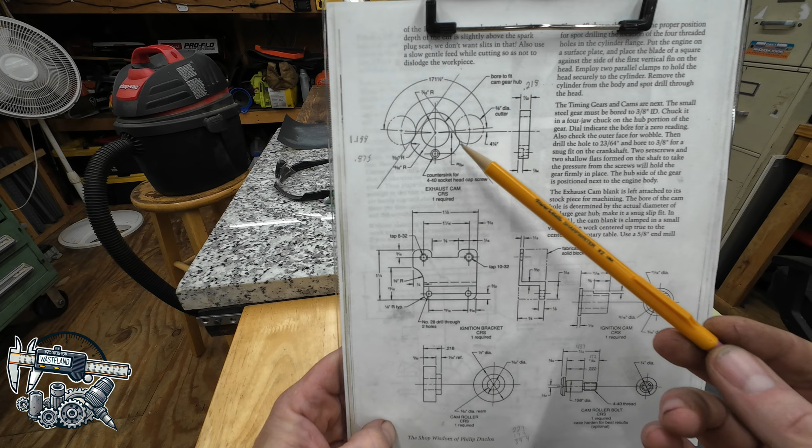Alright, so we have to make this camshaft right here, which is only used to open and close the exhaust valve. The intake valve works off of suction. I'll show you more how this all works when the engine is finally assembled. But as you can see, it's a kind of unconventional cam lobe shape. It's 218 thick.

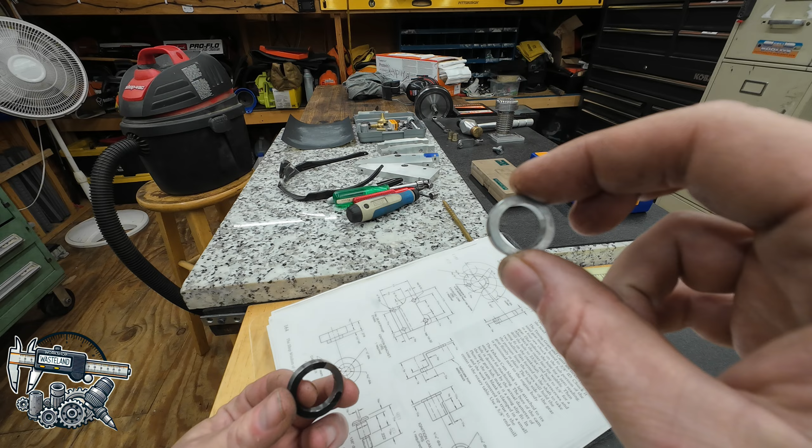Mr. Joe came up with a really clever idea to make this out of 2 separate pieces, which I'm going to try and do. I don't know if it's going to work or not, but it seemed to work in his video. Basically, this piece is the inner radius, and this piece is the outer radius.

I think you can see those 2 scribe lines on there. What I'm going to do is cut along these 2 scribe lines, clean it up really well, and then try to silver braze this together.

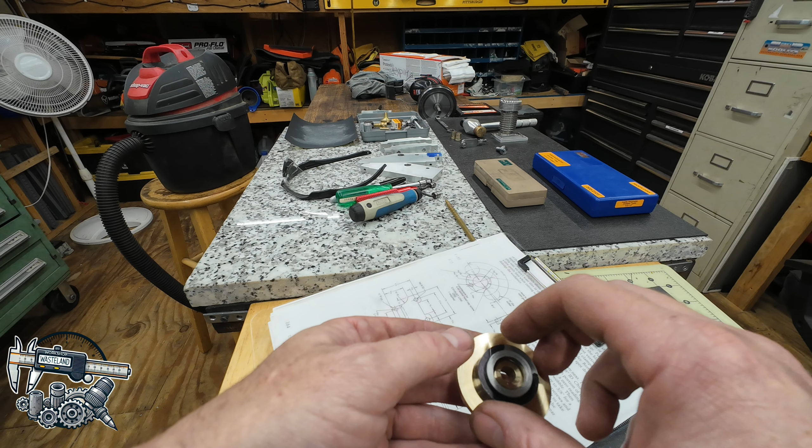Then, once assembled on our cam gear, it's going to look like this, and that's going to be the cam. This is of course going to be out here. I don't want to push it all the way on because it's a pretty tight fit, but that should create our cam lobe. So I'm going to get this sawn up and soldered, and then come back and show you whether it worked or didn't work at all. But in theory, it should work.

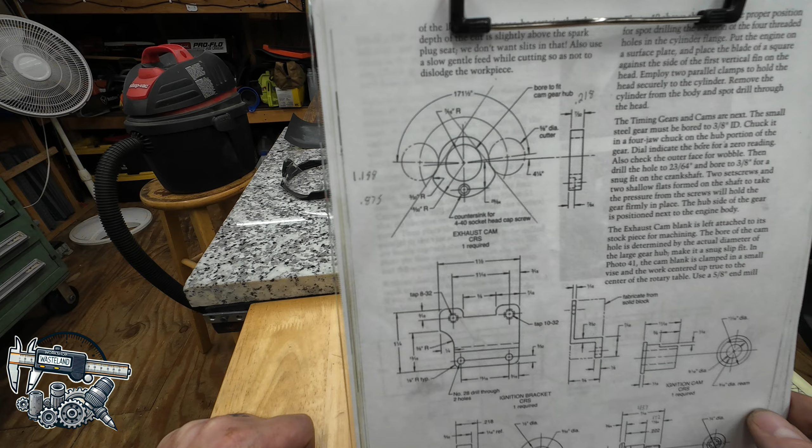I guess the ideal solution would be to cut this on a rotary table with a round end mill, doing a 171.5 degree sweep. But my only problem is my rotary table has a good bit of backlash in it, so I don't think I can do that super accurately. I've tried cuts like this in the past and it hasn't worked out well for me, so I'm going to give this a try first.

It was just a matter of turning these 2 rings up on the lathe, which was pretty easy—literally 2 metal rings, nothing to that. And I'm going to try this first. If it doesn't work, oh well, then we'll try the rotary table as the plans specify. But let's give this a try.

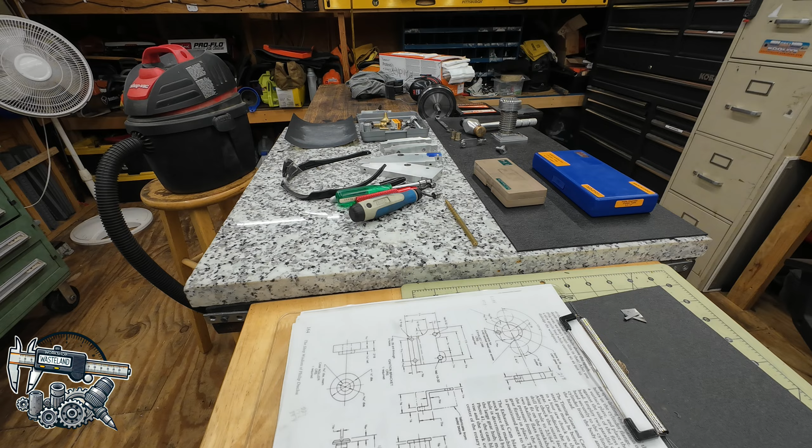So here's what you end up with for the cam lobe. And then this of course fits into our gear piece like so.

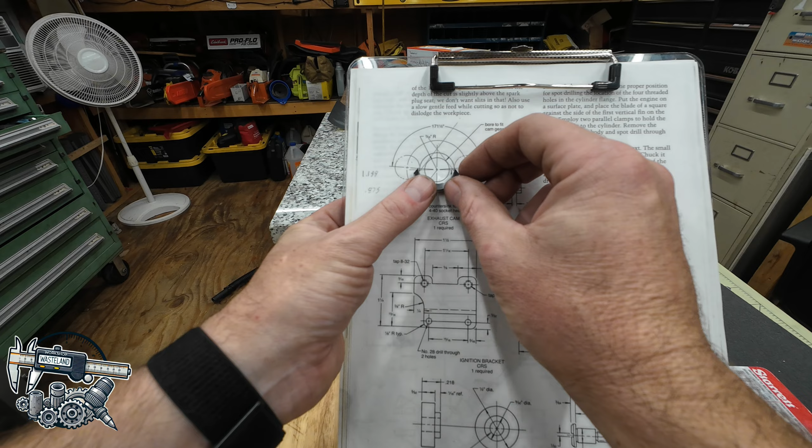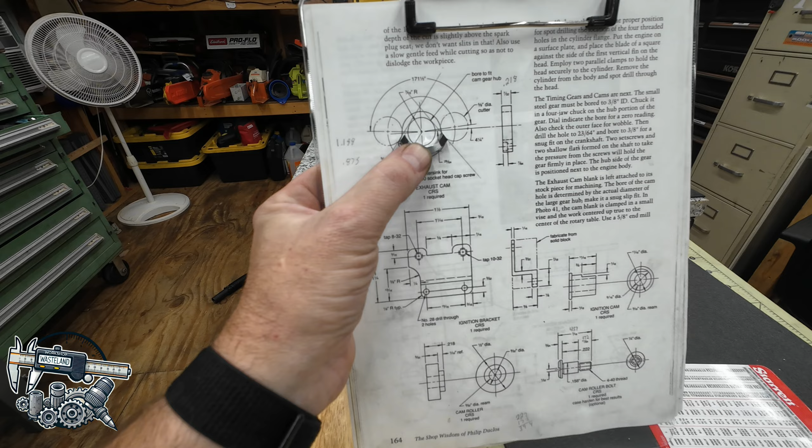However, whenever you lay it onto the print, it looks pretty darn good. Probably not 110% perfect, but I cut another one. This was the first one, and I cut it wrong, so it ended up not working, but we have what we need now. So I think we will be good to go when I lay this all together onto the print.

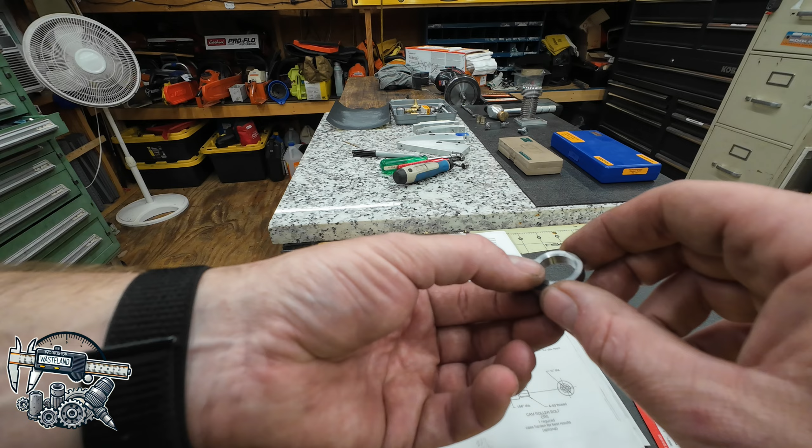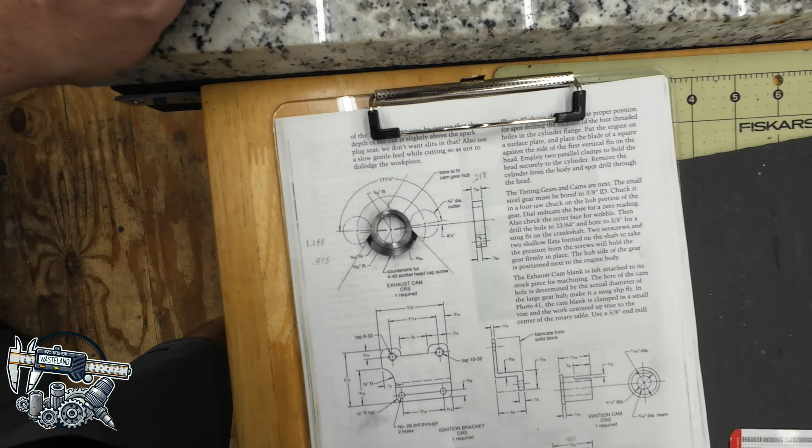Get it lined up with the hole here. That sure looks like it's going to be the cam lobe. I do believe that's going to work just fine, which is awesome. I'm going to silver solder this and we'll go from there. With any luck, that will be our cam.

Well, there it is. I used way too much silver solder, but I think we got a good strong joint on it. I am going to clean this up with some sandpaper and my belt grinder, and we'll see how it looks when it's all said and done. But I think that's a camshaft if I've ever seen one. Now we just got to see if it's going to work.

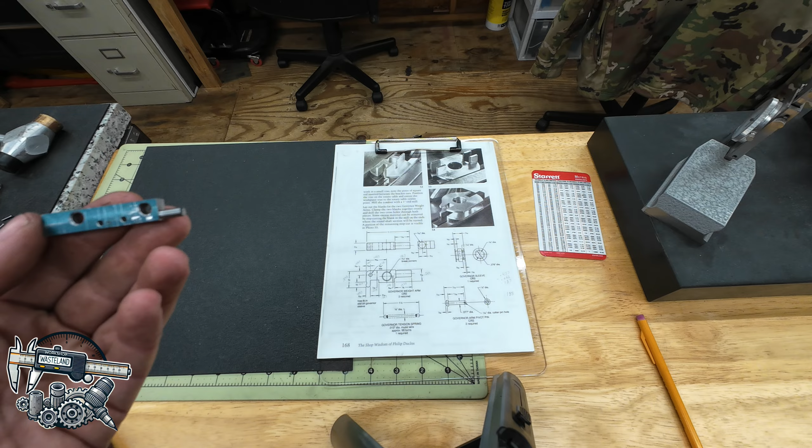So here at the end I'm going to make these, what are they called? Governor weight arms. I'm not going to video a whole lot of it. It's a really straightforward piece to make.

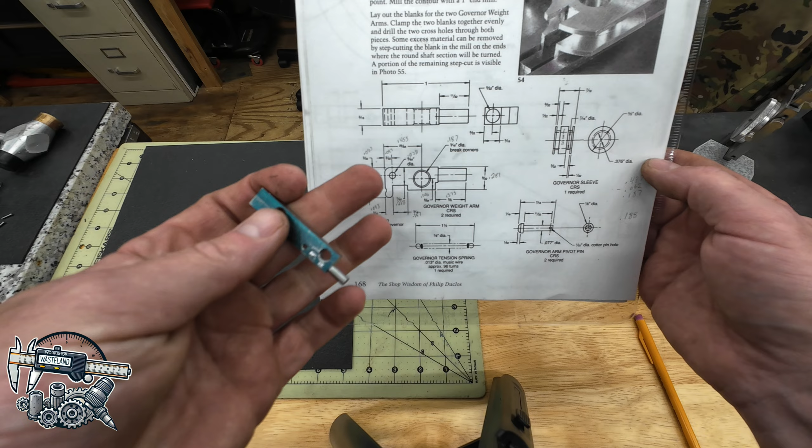This little dimple here at the end, I'm probably just going to barely hit that with a little tiny end mill and then use the belt sander and make that round. But that looks super complex, but it's literally 2 holes, turn the end of it round in the 4-jaw chuck, which you'll see me do, and then cut these 2 in half and kind of finish them up with a file and stuff. But like I said, it looks complex. It's a super easy part to make.

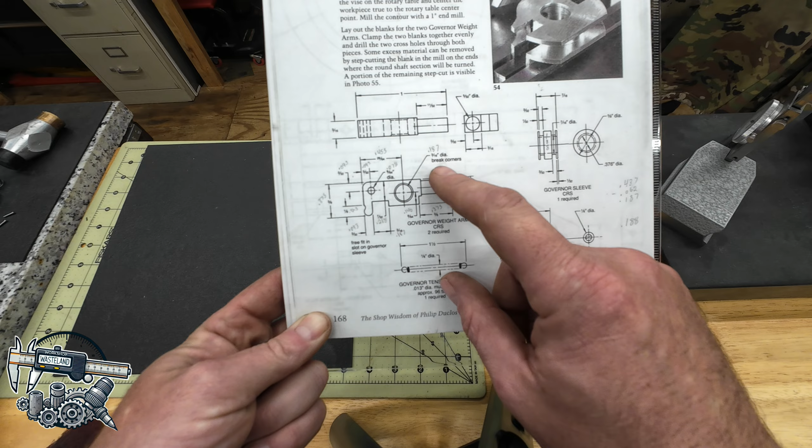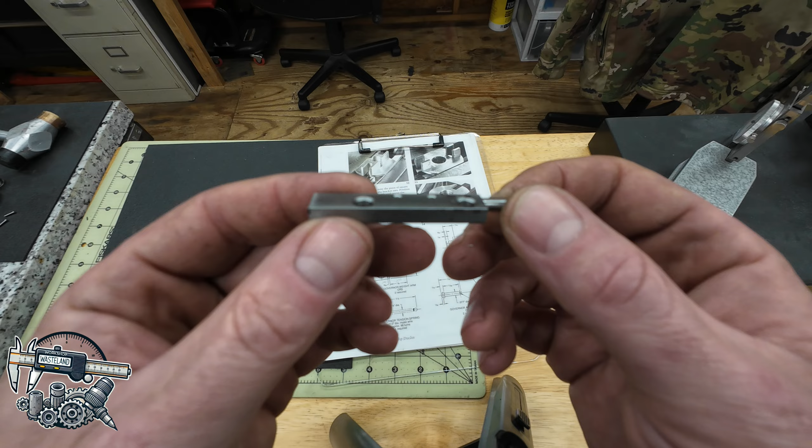I literally cannot show you every single thing that I do, or this is going to go on forever. One thing I will say, this 3/16 diameter hole, it says right here to break the corners. That's going to have a long spring passing through that. So I used the deburring tool. You can probably somewhat see it there, to break the corner real good. And that's just to keep the spring from getting snagged in that hole.

That's the only reason that's there. But yeah, pretty easy part to make. Like I said, I'll show you turning down one of these pieces on the end, and then I'll bring you back when it's a finished product.

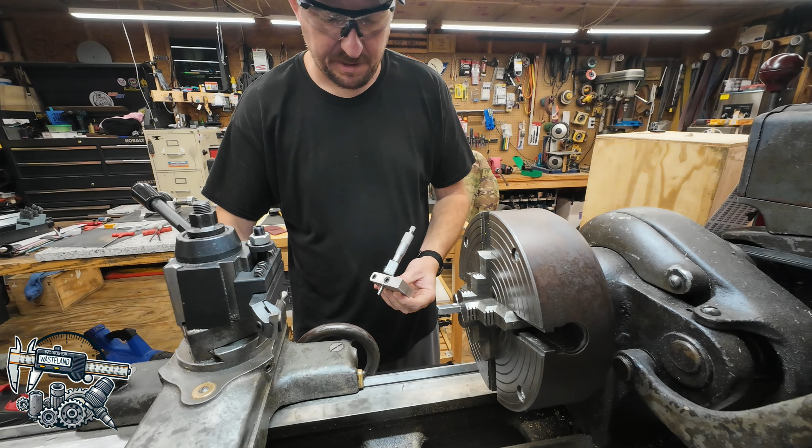So that means now we get to do one of my favorite operations on the lathe, which is making something that is square into something that is round. I just feel like it's really satisfying whenever you do that. So that's what we're going to do.

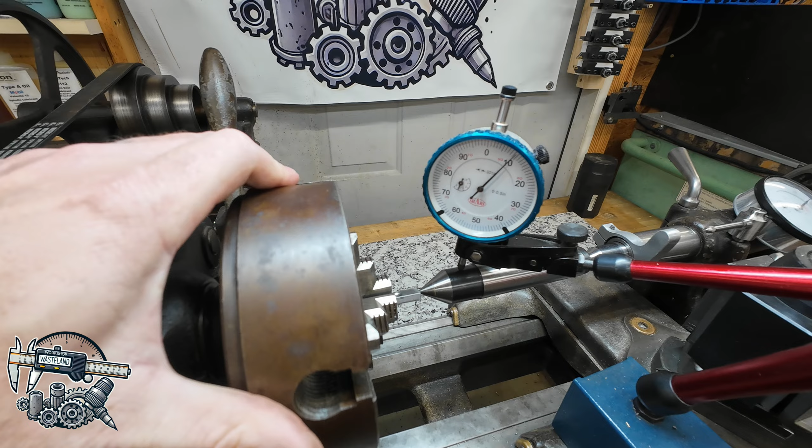Need to get set up here for an end stop. Got this part dialed in close enough. We're within a thou and a half, which is just lovely. There's my setup. I do this all the time. A center stacked with a center and a punch mark on the end of the part. I think that's the easiest way to dial in a square part in the lathe.

So the round is turned, looks like 11 30-seconds long. That's kind of an oddly specific amount. 11 30-seconds is 0.344, we're going to call it.

So one, I've got my hard stop a little close here. 2, 3, 44 is right there. Get my stop set up over here so we can just keep bouncing right into that. All right, that's probably a bit fast.

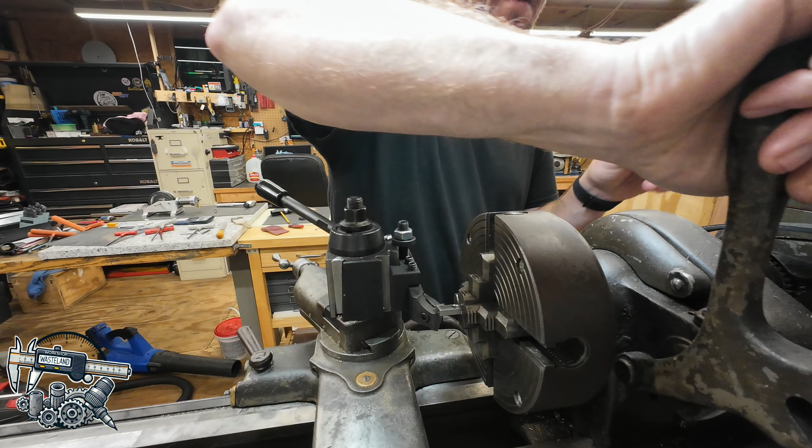Here goes nothing. Like I said, making a square peg fit in a round hole. There we go. Round peg for a square hole. Like I said, one of my favorite operations to do.

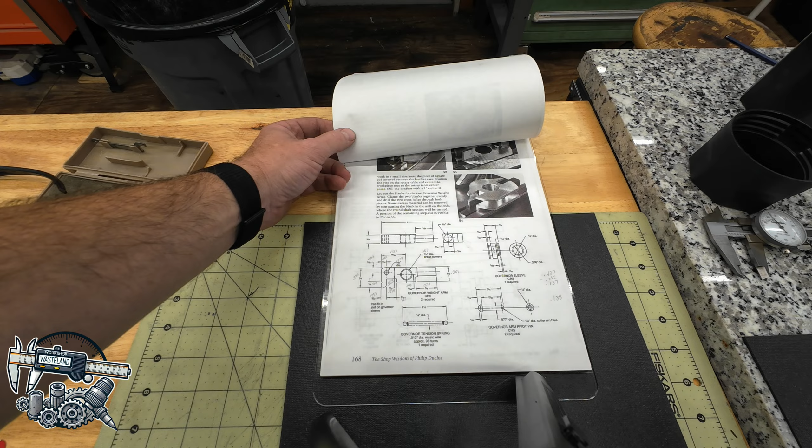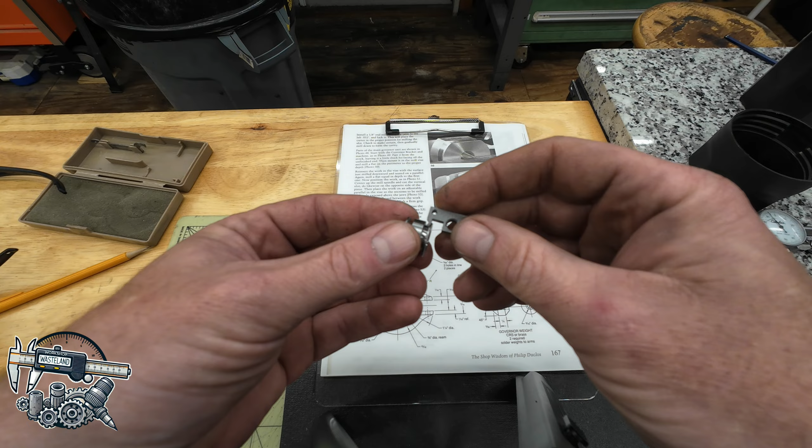Alright, well, there's our little piece. It's got the little hook on the back. I may have used an end mill and went a little bit too deep on that kind of rounded hook on the back. But that's gonna be in here like this, and it needs to be able to pivot. So, hopefully we did okay there. Worst case scenario, I'll remake it.

This is the spool that's going to pull the governor open and closed. And then I made these little governor weights, and I'm going to solder them into there. And that'll pretty much be the extent of the governor.

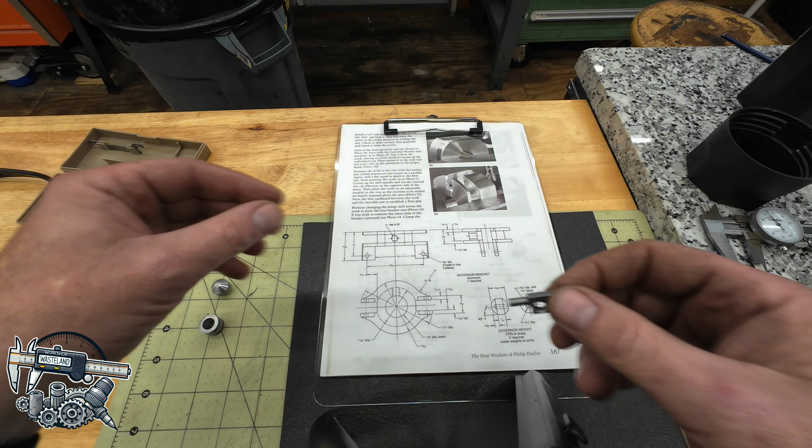These are the pins. I still need to drill some cross holes in those for a cotter pin. These were pretty fun to make. They're super small. But got them done. So overall, here's what we have.